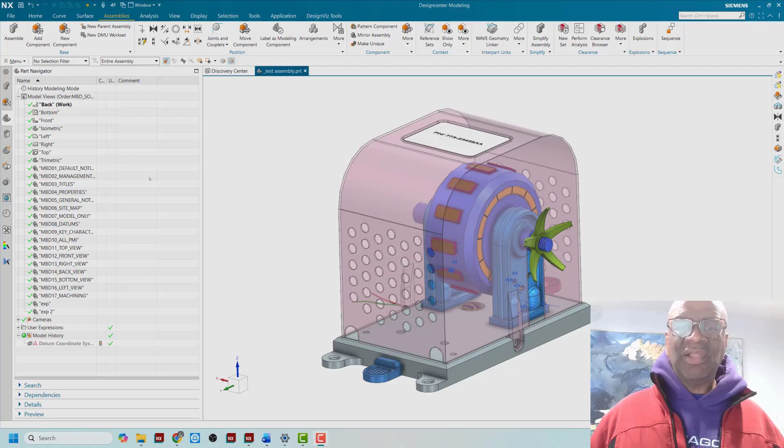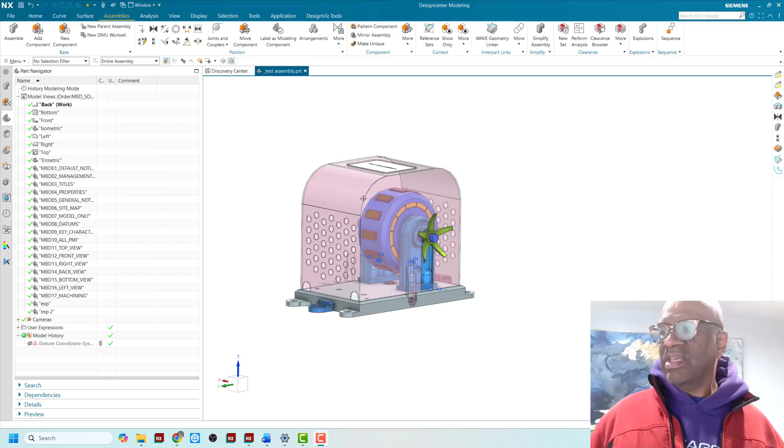This post is about a very new ability that we have in NX 2506, called Label as Modeling Component. The need is when you're in an assembly with a bunch of components and you want to make changes to the positions of certain components, the other components surrounding it, holding it, or touching it can change commensurately with a move command.

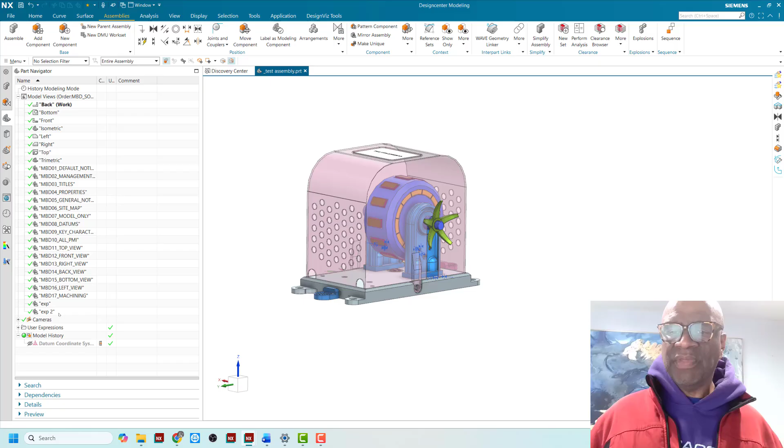So this little assembly is made of a bunch of different components. This is the rotor here, and these are the brackets that hold the rotor in place, and this is the little cover that holds it together. There's a little fan, and all these little pieces come together for this assembly.

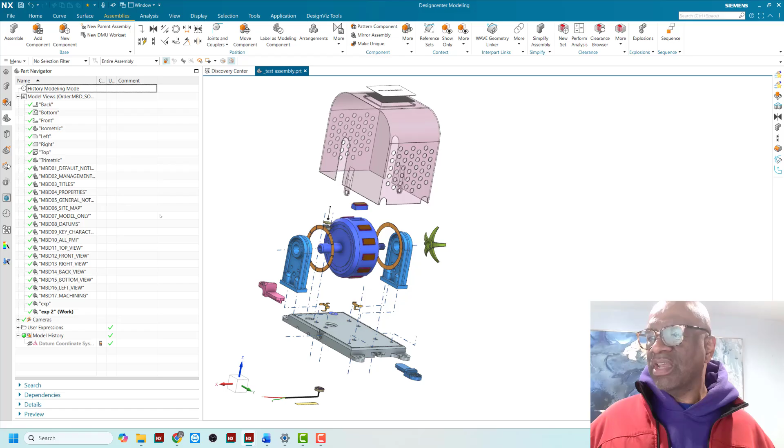What I want to do is impose a move to this rotor. I want to move it up an inch, and I want the brackets to change their shape commensurately. So I'm going to go back to regular view, and go into Assemblies, and select Label as Modeling Component.

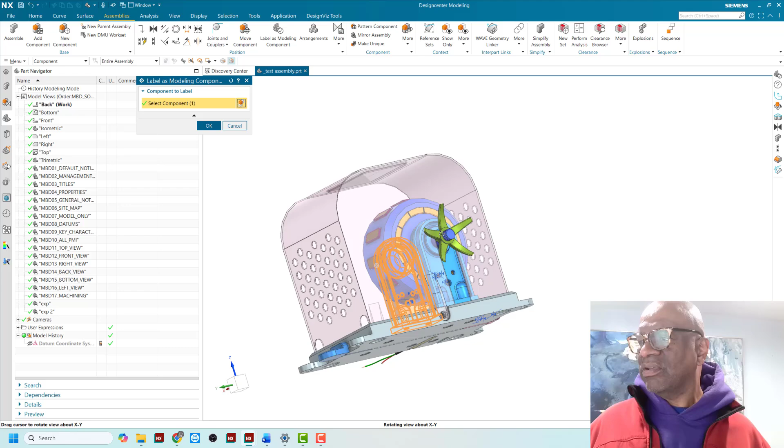I'm going to select the two brackets like so. There we go. Once that's done, they change color to a little pinkish color. I'll hide the cover there. And what I want to do is move this rotor, the magnets that are associated with it.

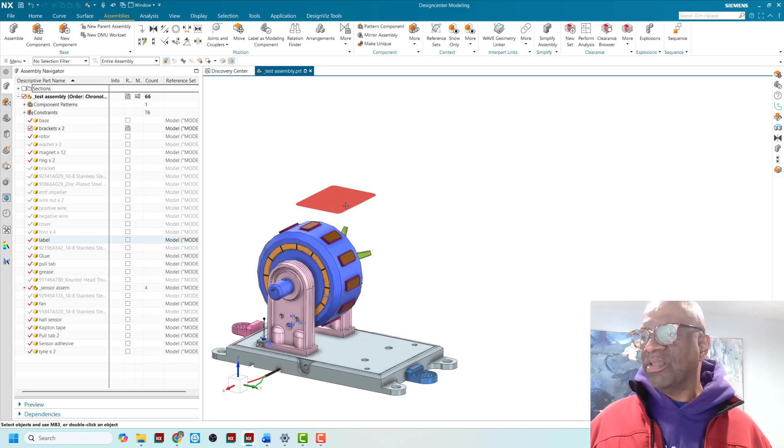This label and the glue that holds it on, I want to move those up by 2 inches. And there's a bracket here, as you can see, that is also going to have to move if I want that bracket focused on that rotor.

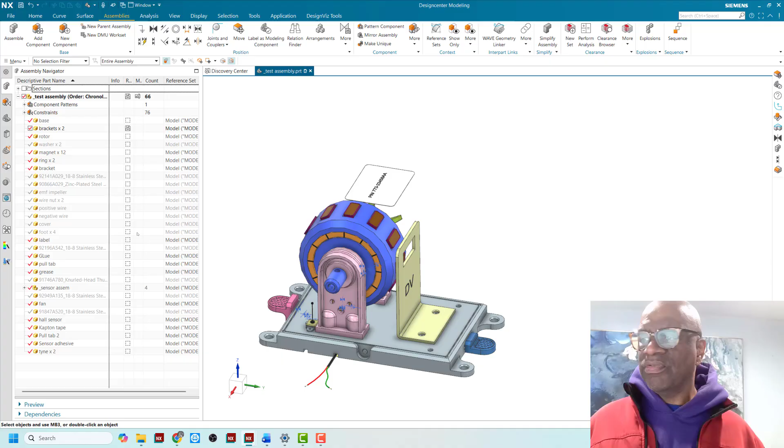Just to show you the way to move the rotor and have the brackets update - now that you've said Label as Modeling Component, you can go to the Move command, and what we're going to do is move the rotor.

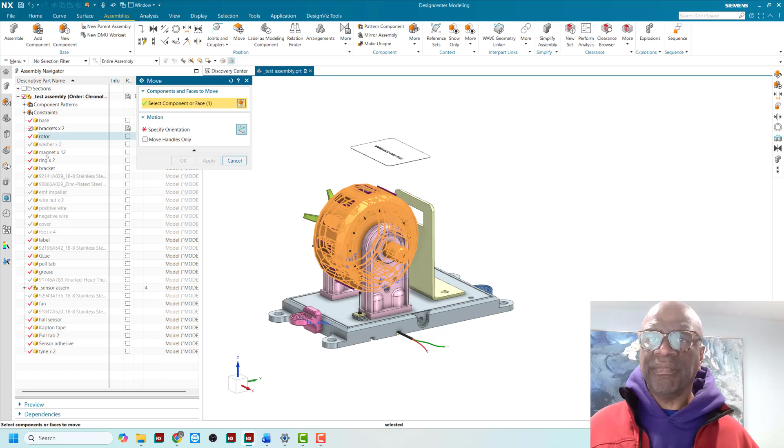We're also going to move the magnets associated with the rotor, so I'm holding my finger on the Control key and selecting the magnets. Then there's a label and some glue that holds it on, so I'm selecting the label and the glue. I've actually modeled the glue.

I say specify orientation, and do a single click on the Z translation there. I'm going to type in 1 inch - let's make it 1.5 so you can really see that it changes. I'm going to enter that and say yes, and NX is now doing its thing.

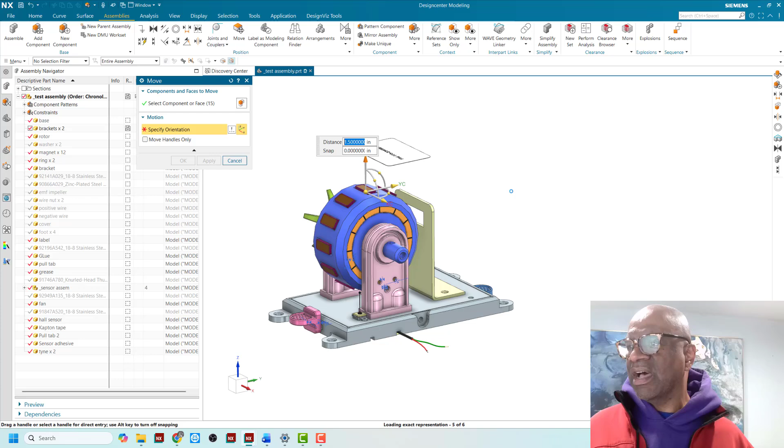As you can see, the rotor has moved up with the magnets, and the label and the glue, and the brackets have changed commensurately. Isn't that awesome? So then I'm going to look at the cover, and now I can see the cover needs to be changed.

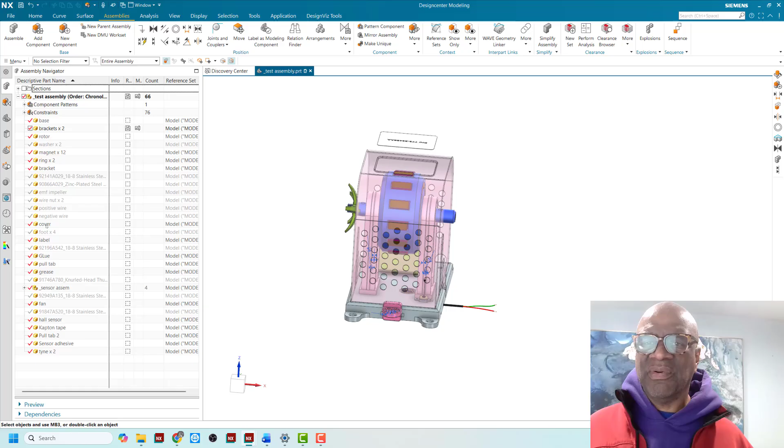So I'm going to double click on the cover, go into it, go to Extrude, and add that 1.5 there, just like that. Say OK. So now the cover is going to update perfectly, and nice.

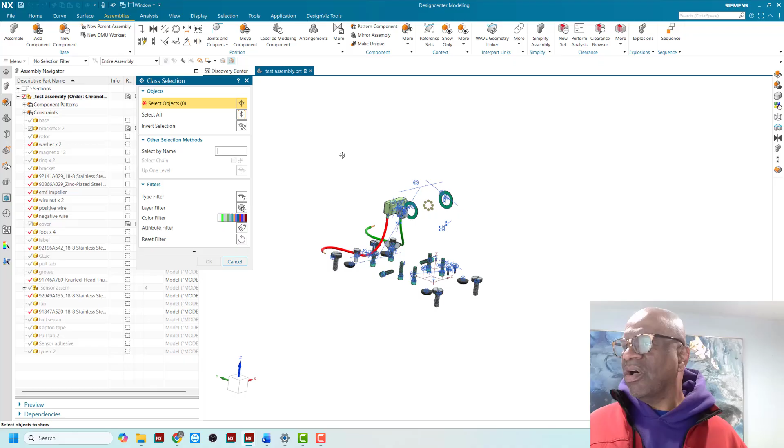So I go back to my assembly. I'm going to Control-Shift-K and bring back all my little components there. And Control-W to hide the assembly constraints so I can see what's going on. And as you can see, everything is now updated.

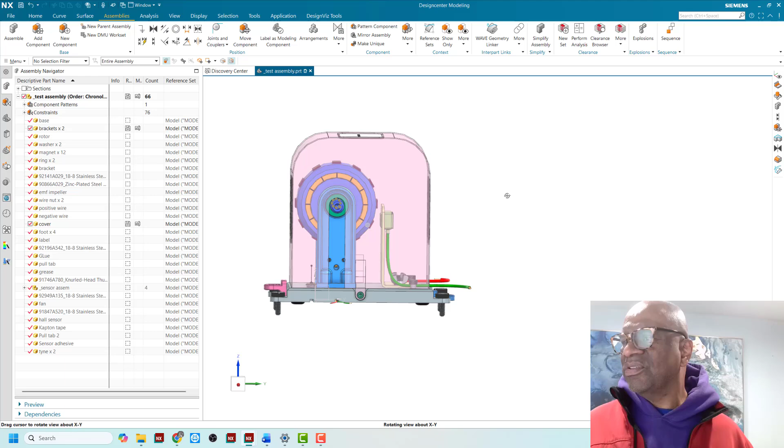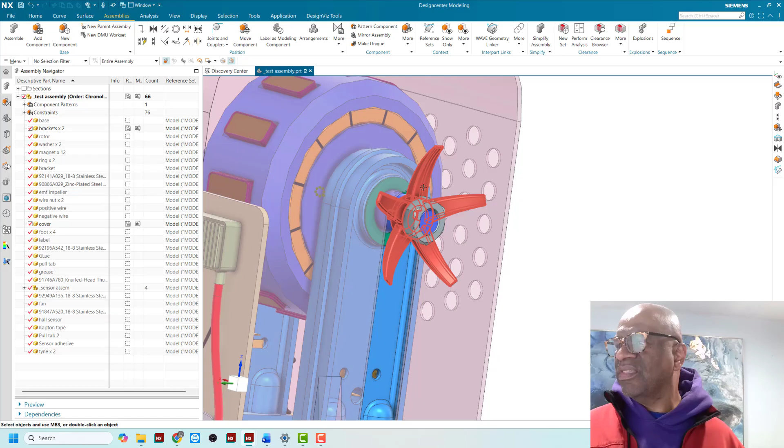The slots in the cover have updated. The top of the cover didn't, because it had nothing to do with the assembly constraints, but this move that I imposed has changed the location of the rotor, the magnets, the little rings in the rotor, all of the hardware - the little washer and the nut - and the fan have moved commensurately as well. This becomes a very, very powerful way of editing your assemblies.

It's great technology, so congratulations Siemens on creating this or implementing this. I think it's very powerful, and I'll get a lot of use out of it.